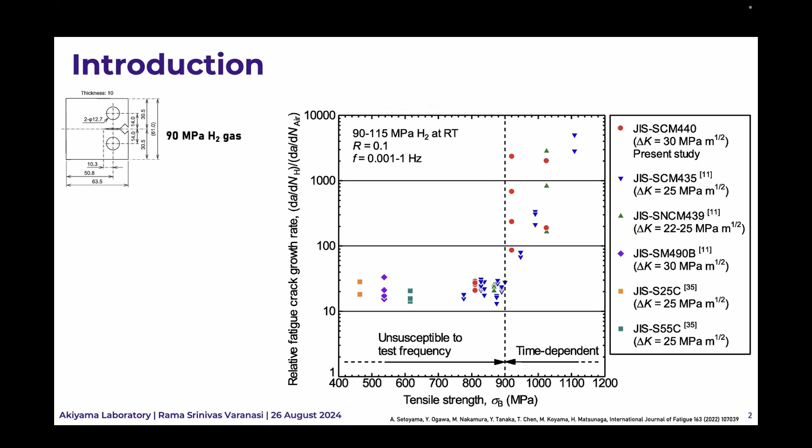In this context, there was an empirical study which showed that when the tensile strength was greater than 900 megapascals, the relative fatigue crack growth had a frequency dependence. For example, this is SCM440 tempered at three different temperatures, 550, 600, and 650. For the case of 550, the tensile strength is greater than 1000, and we can see that as the loading frequency changes from 1 to 0.1, there's an order of magnitude difference in the relative fatigue crack growth.

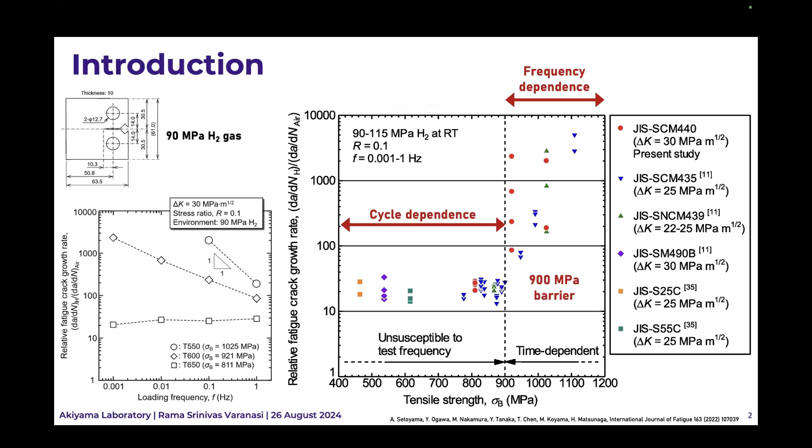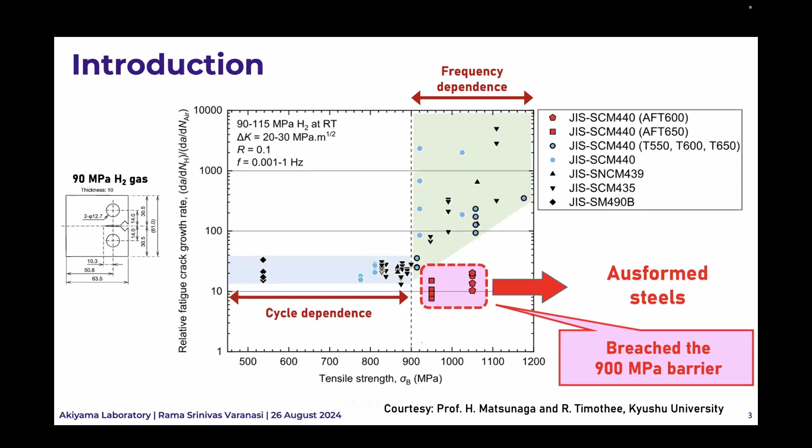This is obviously not desirable, and what is ideally required is a cycle dependence rather than a frequency dependence. This we can refer to as a 900 megapascal barrier. However, recently, Professor Matsunaga's group found a couple of steels, same composition, but with ausforming, they were able to breach this 900 megapascal barrier. And we can clearly see that there is no frequency dependence, even though the tensile strength is much greater.

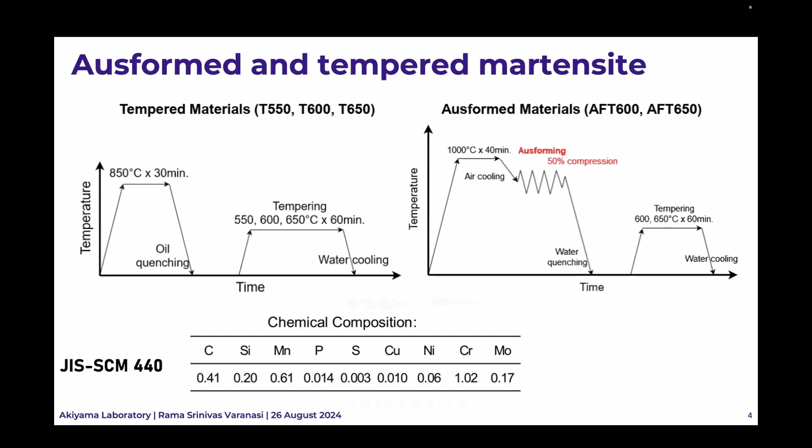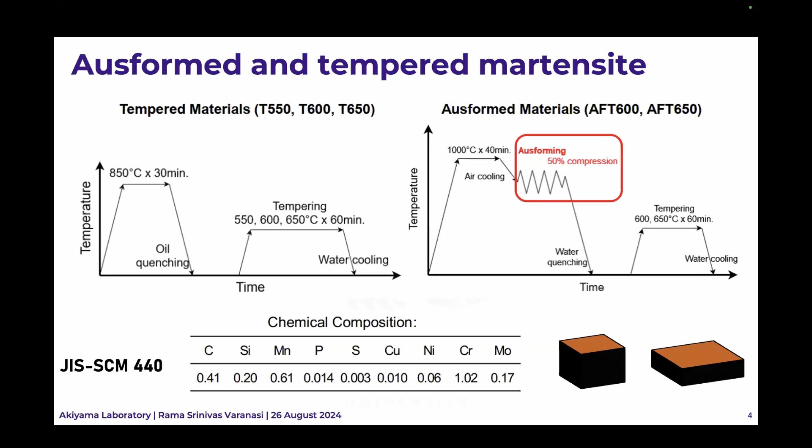So the previous steels were tempered materials, which will be referred to as T, and the ones with enhanced properties are ausformed materials, with ausforming at about 50% compression. Essentially the sample has been taken out, the surface temperature is measured with a thermocouple, then there is a 50% compression, and after that, again the typical tempering process.

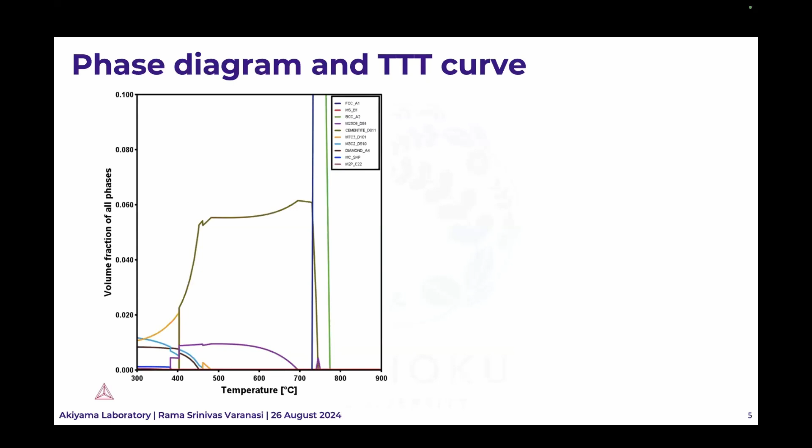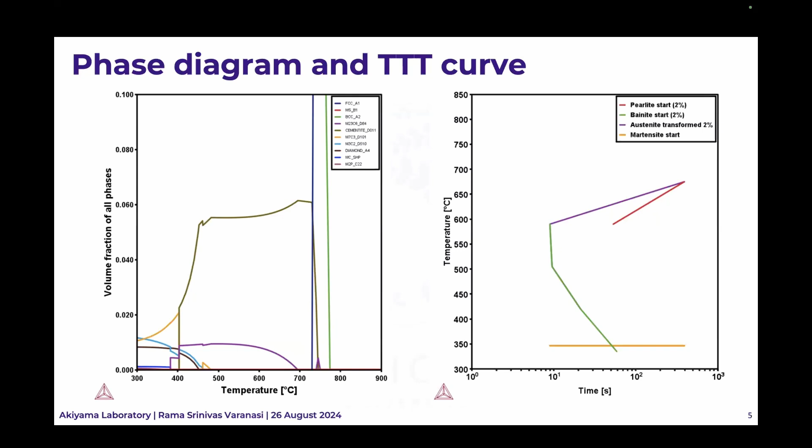When we look at the phase diagram, we see a lot of carbides which form at temperatures lower than 750 or 800. So we confirmed with TTT curves that for whatever the temperature of ausforming, we do not have any primary carbide precipitation. So to understand the effect, we need two things. The first is the microstructure, and how ausforming changed it. The second is the effect of this microstructure on the hydrogen-assisted fatigue crack growth.

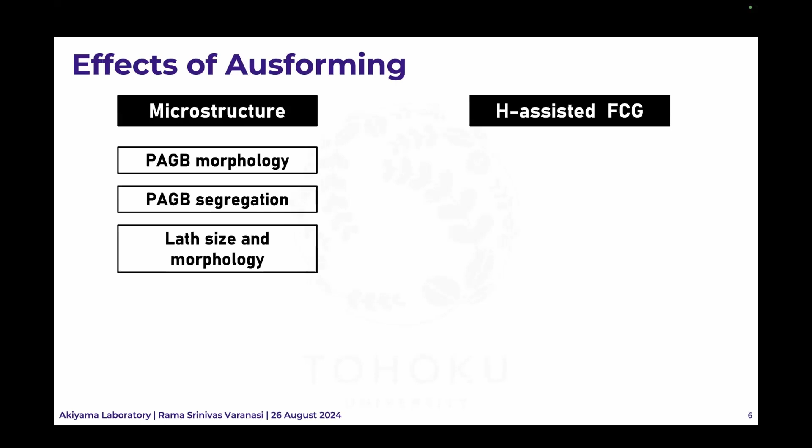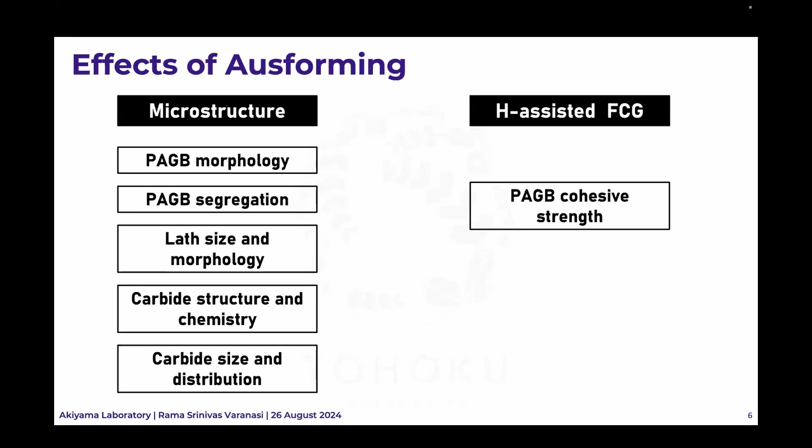In the microstructure, a few changes are prior austenite grain boundary morphology and prior austenite grain boundary segregation. We have the lath size and morphology, carbide structure and chemistry, carbide size and distribution. These affect the prior austenite grain boundary cohesive strength, hydrogen permeability, hydrogen trapping ability, and fatigue crack path. The PAGB morphology can directly influence the fatigue crack path. The PAGB segregation affects the fatigue crack path as well as the cohesive strength. The lath size, we expect it to affect the fatigue crack path. The carbide structure, chemistry, size, and distribution will affect all four components.

So in the talk, first we will try to determine how this hydrogen-assisted fatigue crack growth is in the ausformed material, and then we'll go back to the microstructural features and see what is the smoking gun. So this is for the purely tempered materials, by Dr. Chen. If we look at the condition where we have a frequency of 1 Hertz, the prior austenite grain boundary fraction is about 45 to 50%.

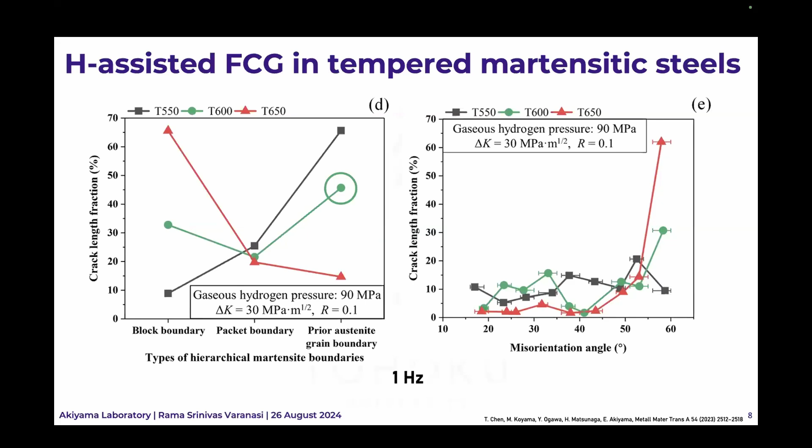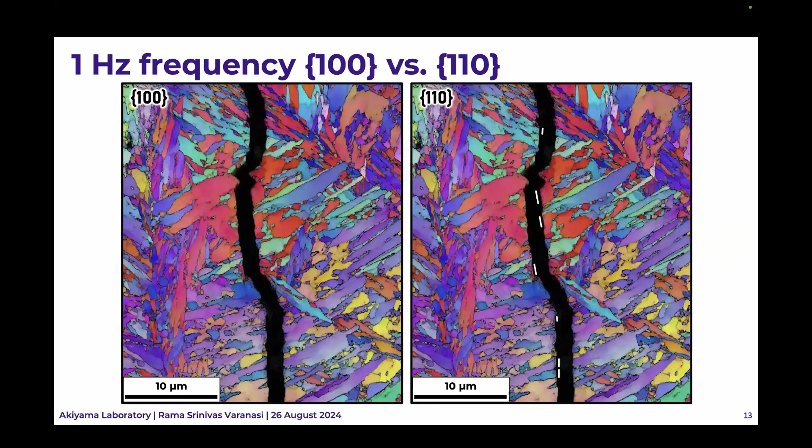We also tried to see if there is any specific crystallographic mode. Occasionally we saw some 110, but there were many areas, for example here, where it was completely trans-lath growth. However, there was no specific crystallographic cleavage plane associated with this. We'll come back to it probably at the end.

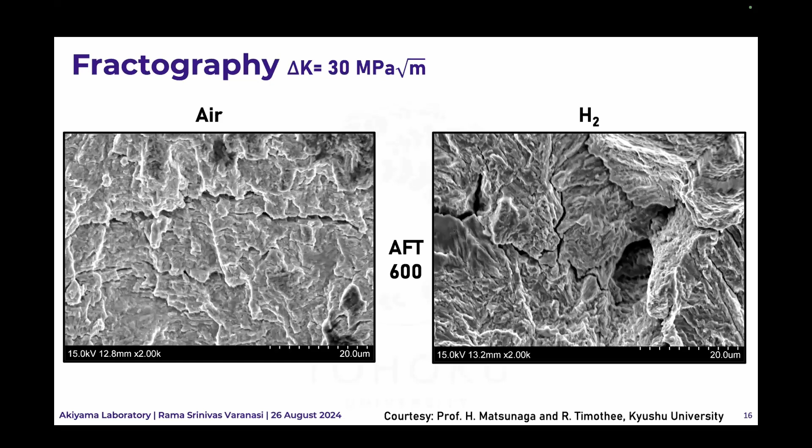The fractography also shows the same story. For the T600, we see some intergranular features. However, in the AFT materials, we have no intergranular cracking. So we realize that there's a change in the fatigue crack path, and this also means there's a change in the cohesive strength of the prior austenite grain boundary.

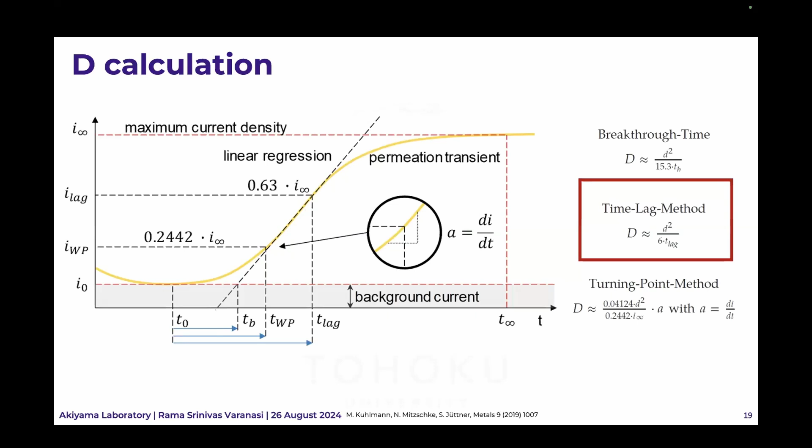Now, the next thing we want to look at is hydrogen permeation tests. This is the standard electrochemical permeation, with hydrogen diffusing and nickel plating on the other side. There are different methods of calculating; we chose the time lag method, where we look at the time corresponding to 0.63 times the stable current. The thickness of both materials was very similar. And we realized that the diffusion coefficient of AFT is slightly lower, but we wouldn't call this a significant difference in the context of hydrogen permeation.

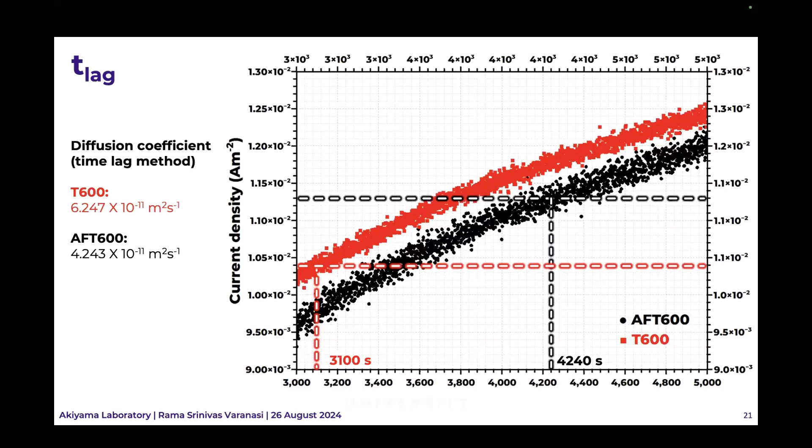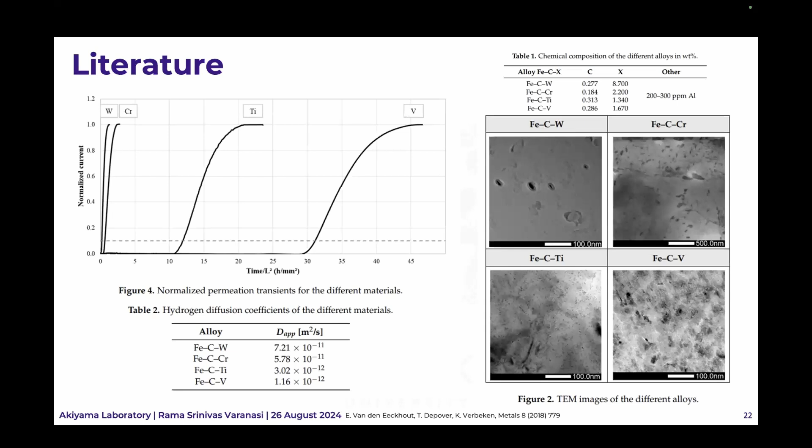For example, if you look at literature, of course, this is for different alloying elements. We see very clearly that in some cases, some carbides very drastically shift the breakthrough time and change the diffusivity. So in our case, we can safely assume that the effect of Ausforming on the hydrogen permeability is negligible. We are yet to perform hydrogen TDS studies to look at hydrogen trapping ability. But now we want to go back and see how the microstructure is affecting this.

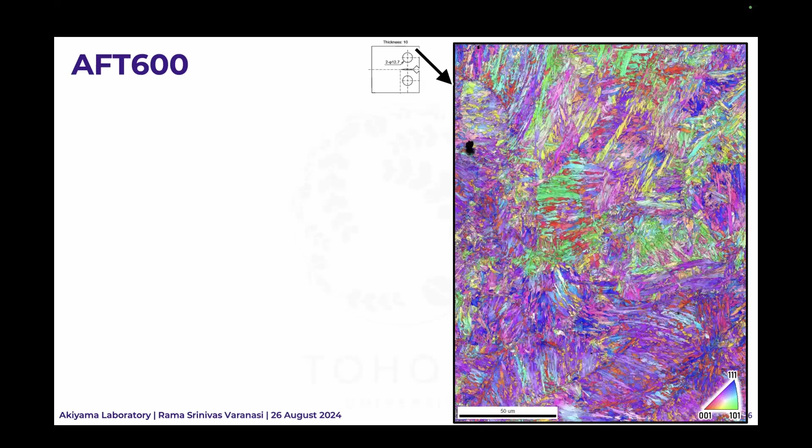Now, the question is, why is this important? We'll come to it in a couple of slides. But now when we look at AFT600, we looked at this corner where it does not have any influence from this crack propagation. So we consider this as the undeformed state. We can clearly see that we have this nice prior austenite grain boundary.

But very interestingly, we start seeing these small grains. I'm not sure if you see. We ideally don't expect this because the Ausforming temperature is much lower than the recrystallization temperature. One hypothesis is the temperature which we measure before Ausforming is on the surface using the thermocouple. It is likely that at the center of the specimen, the temperature is much higher and we see some recrystallization happening. Now, on the transverse direction, we see this pancake morphology. Again, we see these small grains suggesting some recrystallization.

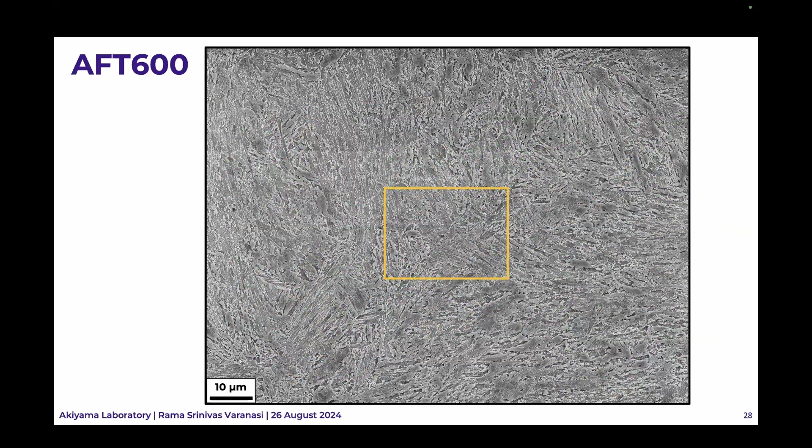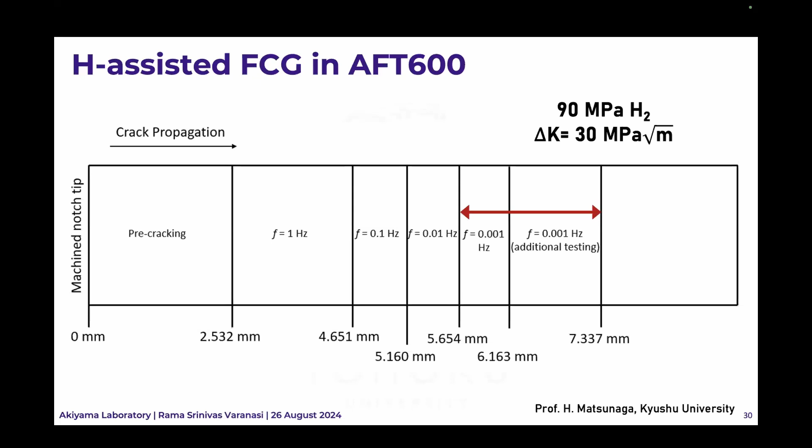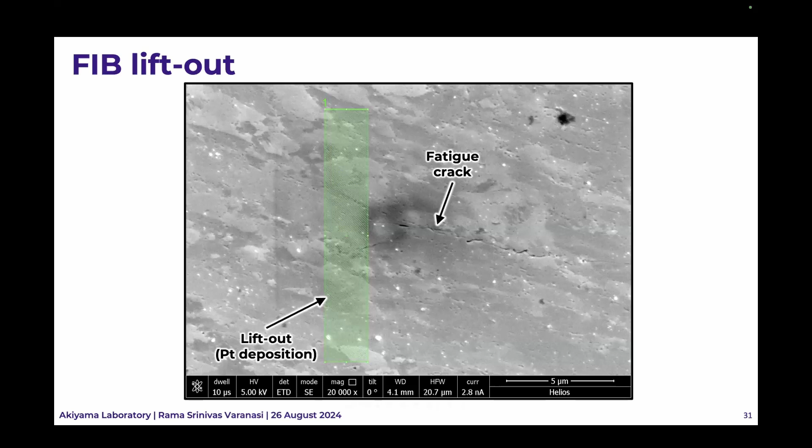However, what was very interesting for us in the Ausformed 600 material is this is a prior austenite grain boundary. But now when we look at the carbide precipitation along this prior austenite grain boundary, the coverage is much lower. And now why is this important? We look at this same material, but now the frequency is about 10 to the power minus 3 hertz. And we made a TEM lift-out at the edge of this fatigue crack so that we can capture the fatigue crack in the lamella.

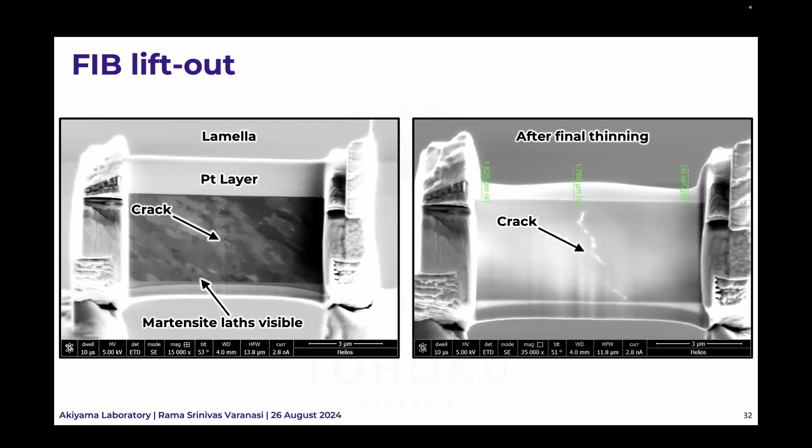So what we see is this is the beginning of milling, and this is after thinning the lamella. We can see this is the crack, so the crack propagation direction is into the lamella. And this is again showing some STEM images. We performed some TKD. The resolution of TKD would be about 8 nanometers. So this is the 10 nanometer step size, and this is 25 nanometers. The reason we went to 25 is, if you see here, this crack is slightly curved. This is coming because of drift, because of the smaller step size. So when we went to a larger step size, we can clearly see that the crack is quite straight.

Here we have this crack which is propagating along the block boundaries. There's this very interesting feature here, which is transgranular crack propagation. And we also see these are translath cracks where we cannot exactly determine with TKD whether this is 100 or 110, because it could be either of these based on the trace analysis. Now, when we look at EDS, we have these chromium-rich carbides. And this is the area I was talking about a couple of slides ago, which is an area where there are block boundaries, but this intersection is actually a translath crack.

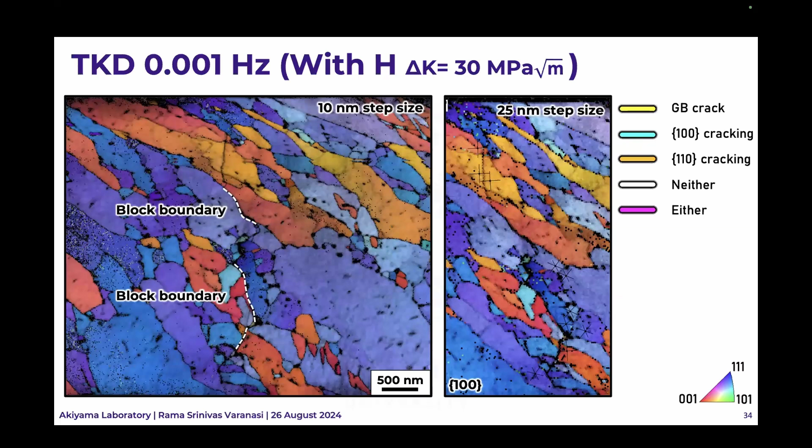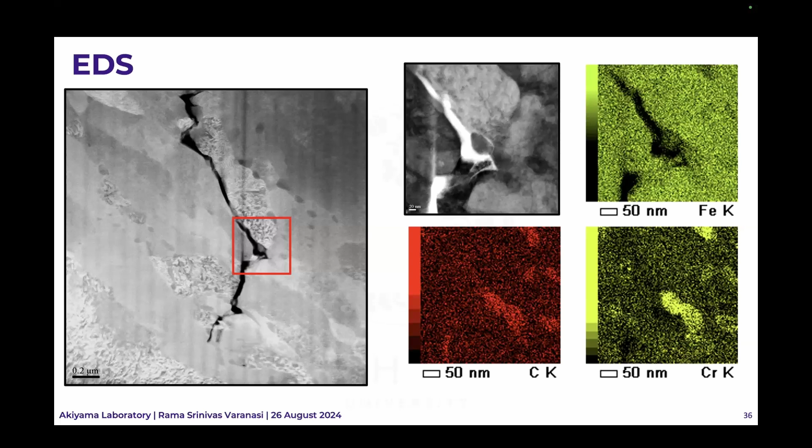And when we look at it, we clearly see there's a carbide, and this carbide is having a decohesion at the boundary. This is a smoking gun for us that when we have these carbides at the prior austenite grain boundaries, these also would enhance the decohesion in the presence of hydrogen. And this was also previously reported that because of Ausforming, the carbide density at these prior austenite grain boundaries reduces, and that is also what we observe here.

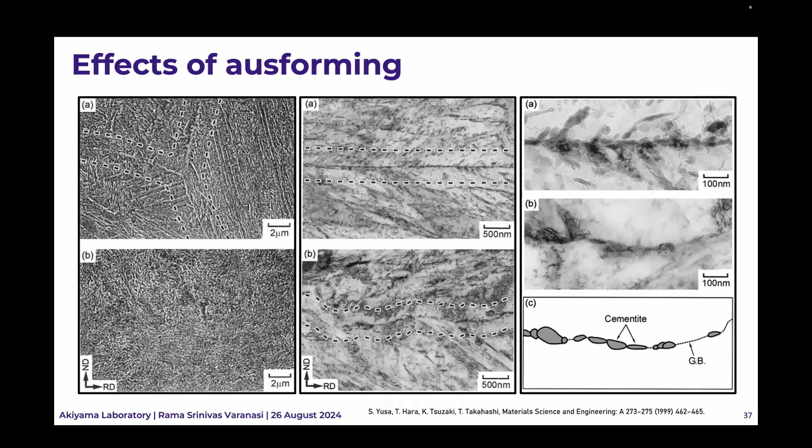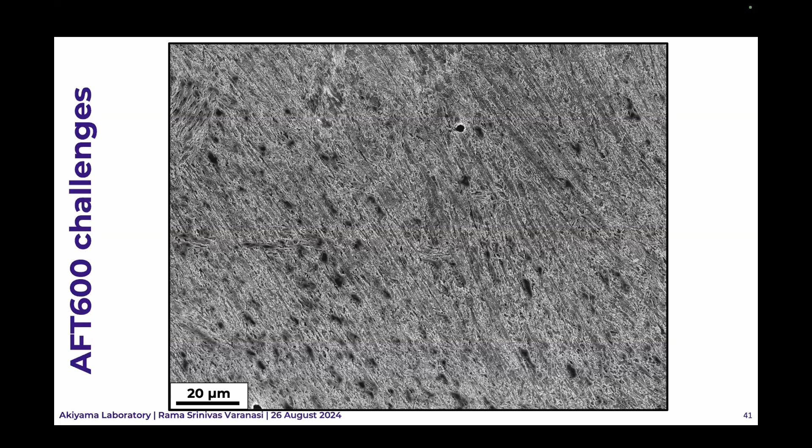Now, 2 minutes. Okay. We also have a few challenges. Firstly, in some areas, we find it very difficult to determine what exactly is the prior austenite grain boundary in the Ausformed material. And in some cases, we see these laths which are about 120 or 150 micrometers in length. The prior austenite grain size is not this big. This might happen because during Ausforming, we are causing only one variant to be selected. The prior austenite grain boundary segregation we are yet to do based on APT studies.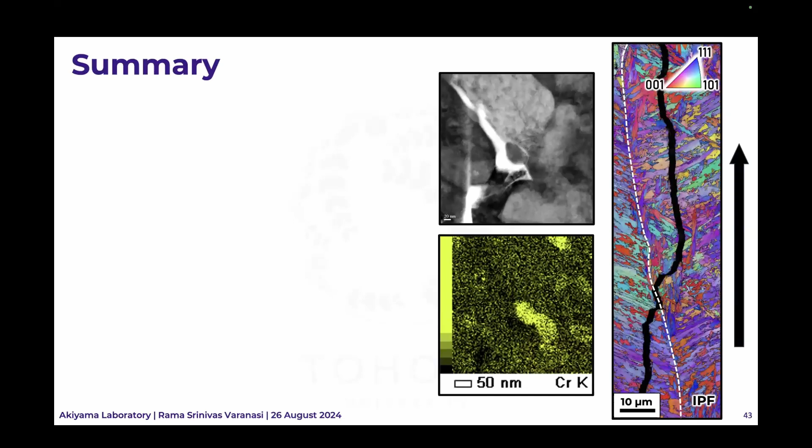Just to summarize, in the Ausformed material, the prior austenite grain boundary cracking was suppressed. The smoking gun at this moment is the carbides at these boundaries, and the coverage of these carbides is much lower in the Ausformed material.